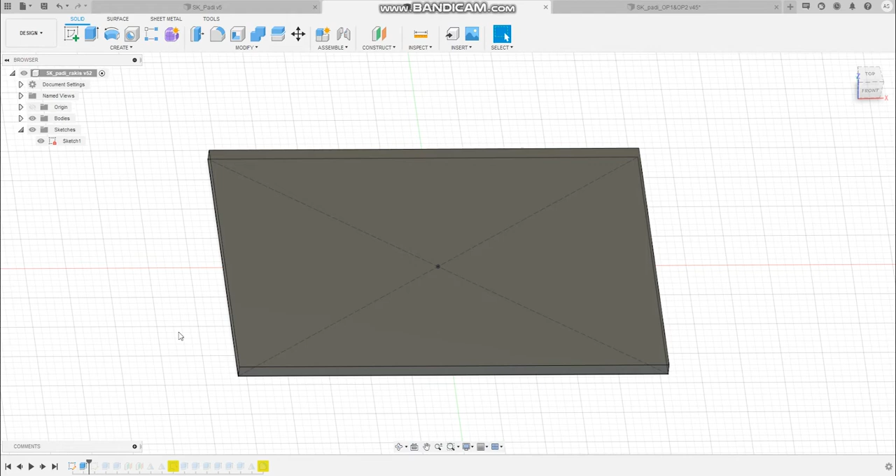Now we can create the sketch for first and third setup as they are made in the same spot. We create a contour line of the workpiece and place it 21 millimeters from the plate sides.

Holes for the fixture clamps are made. They must be 10.15 millimeters away from the workpiece. So this one here, this hole will be for first setup and this will be used for third setup, because at third setup the width of the part is 38 millimeters, but at first setup it is 41 millimeters.

A hole for hex socket head cap bolt is also made, and this is placed 5 millimeters from the workpiece.

For fixture clamp, pockets are made. These clamps are square and one side is 19.05 millimeter in length, and this pocket is 30 millimeters wide, so the round corners wouldn't block fixture grip assembly.

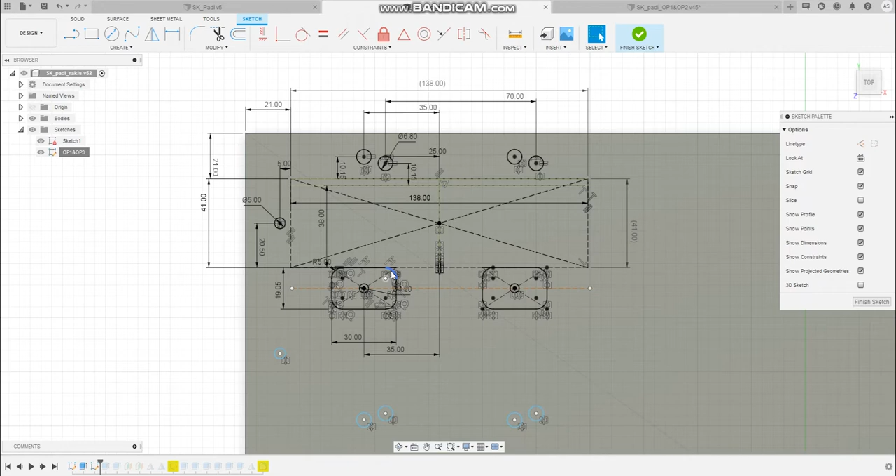To create all the holes to the other side, we just mirror these holes over this mirror line. And now the sketch is ready.

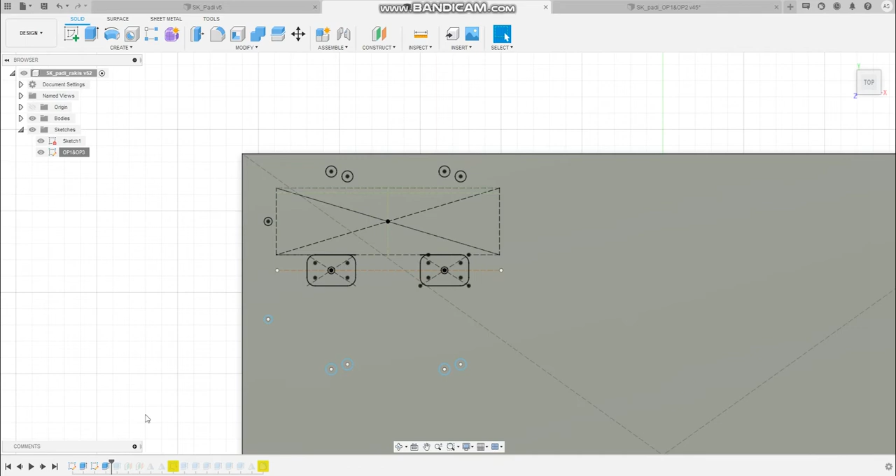And now we just got the pockets and also got all the holes.

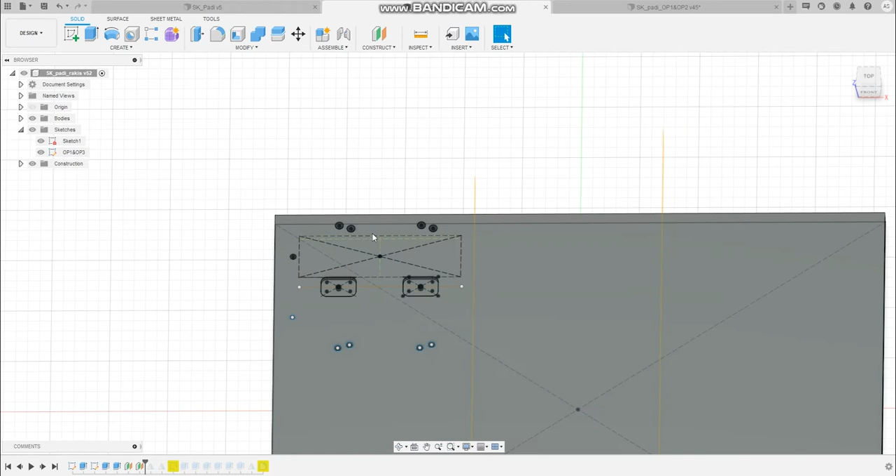And there is place for two more pair of workpieces. To create pockets and holes for them we just mirror our first sketch features, so mirror it one time and another time.

Now the first setup is ready.

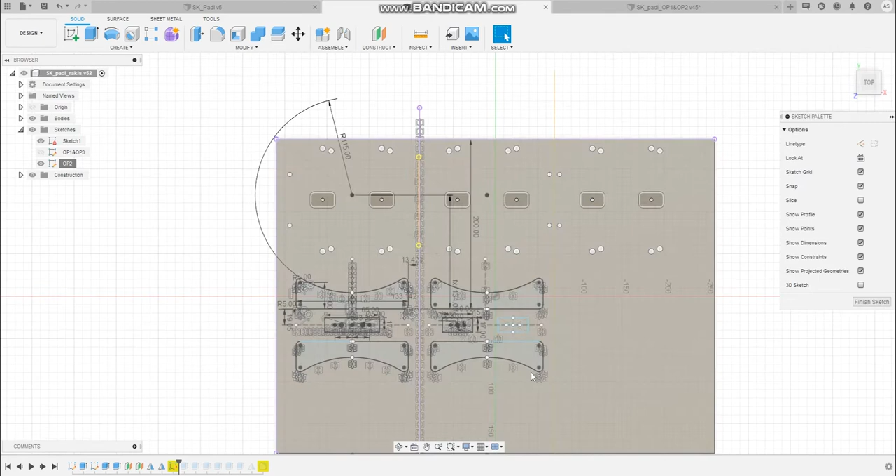For second setup, contour sketch of the part is copied and positioned in the right place.

And there we use two different types of Uniforce clamps, so we need to make two different pocket sizes. This is for the wider one and this is the smaller one. The width of this clamp is 38.1 millimeters.

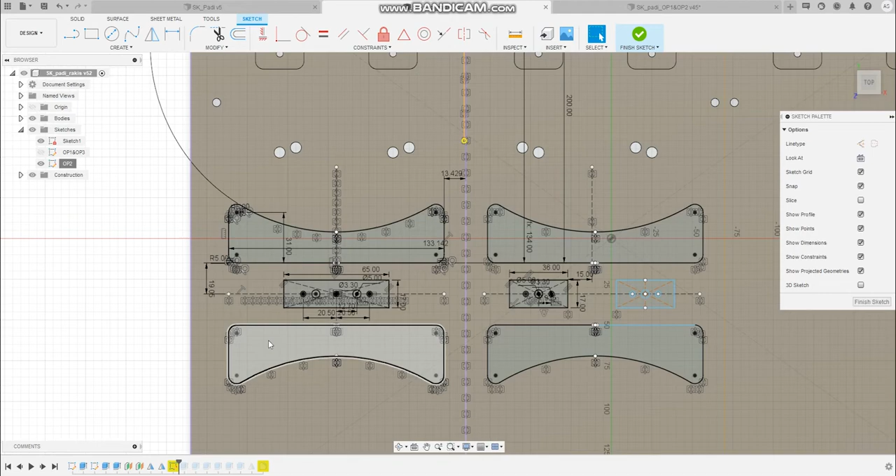And this is how far apart these two sketches are placed. And basically this is for the second setup.

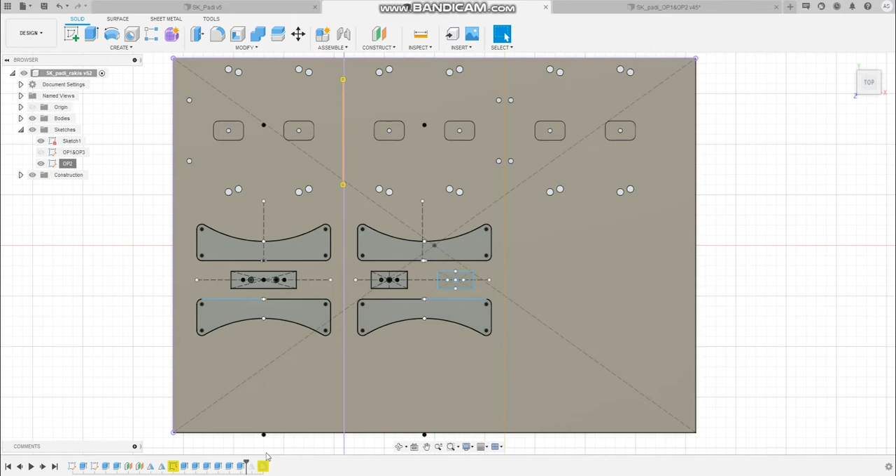To finish all the setup we just mirror this feature over this mirror line and we get the third pair of second setup.

Now fixture plate is ready and we can assemble all parts to it. For this we create another design.

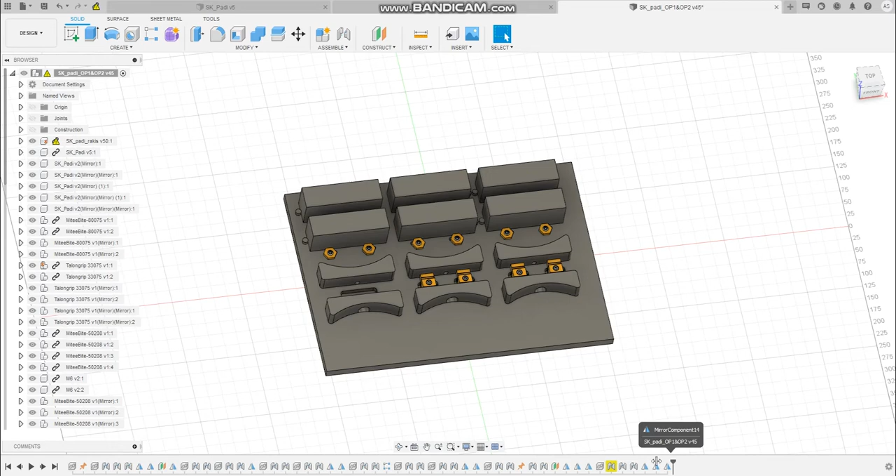This is the design final, and first we insert the fixture plate and ground it, and now we just start adding another components to this workpiece.

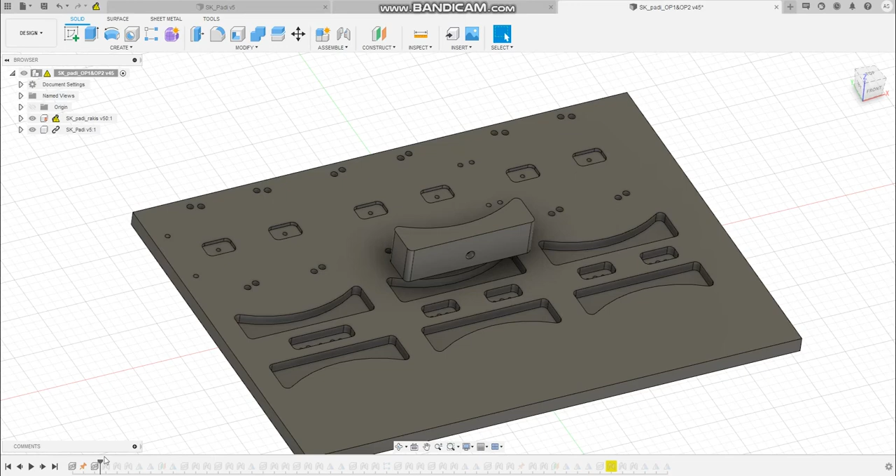First we add our part, we place the part and mirror it to another places.

Next we add the Uniforce clamp, we position it and add another one, position, and mirror it.

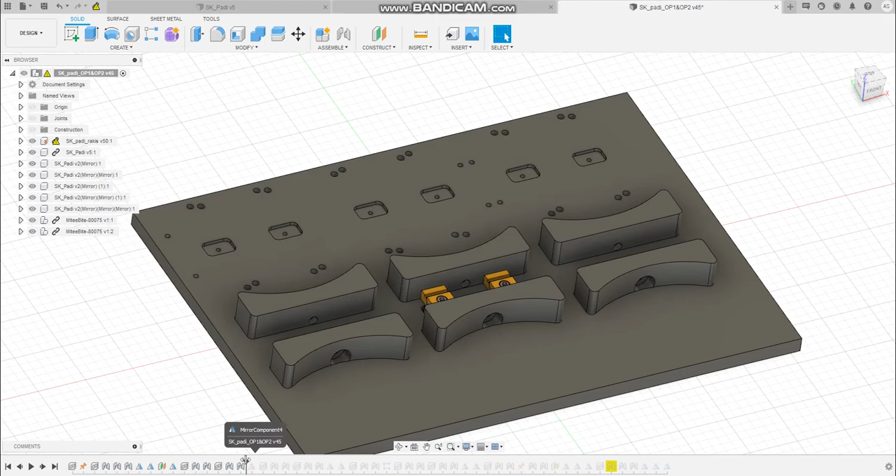Next we add the Talongrip clamp, also position it and add another, position, mirror 1, mirror 2.

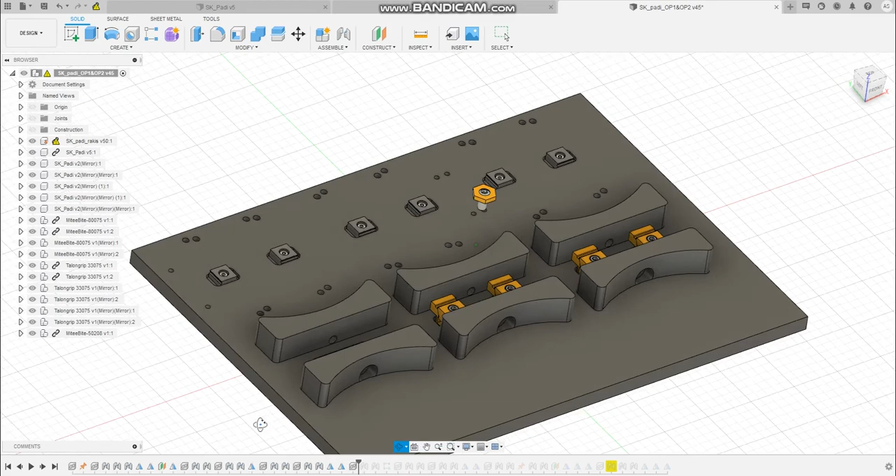Now we add fixture clamp. So we position it, and as it is placed in square pattern, we can use the pattern command and place the other 3 ones.

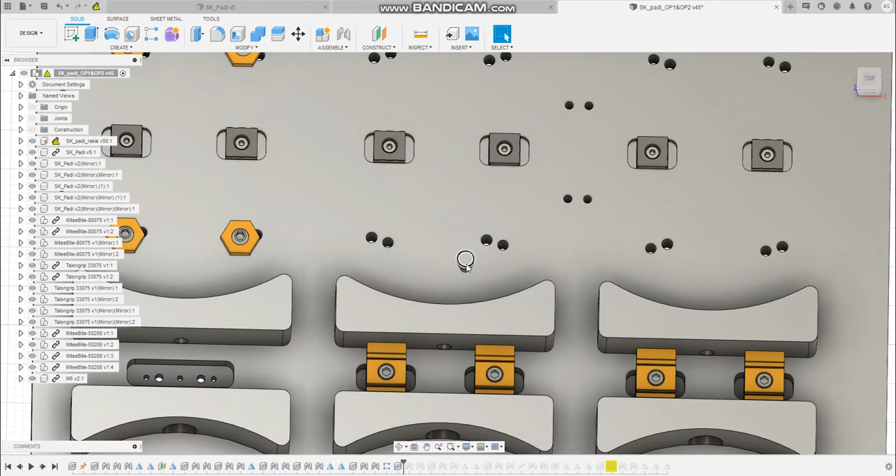Now we add the hex head socket bolts. We place these ones to go into these holes. Put another one and mirror them to these holes.

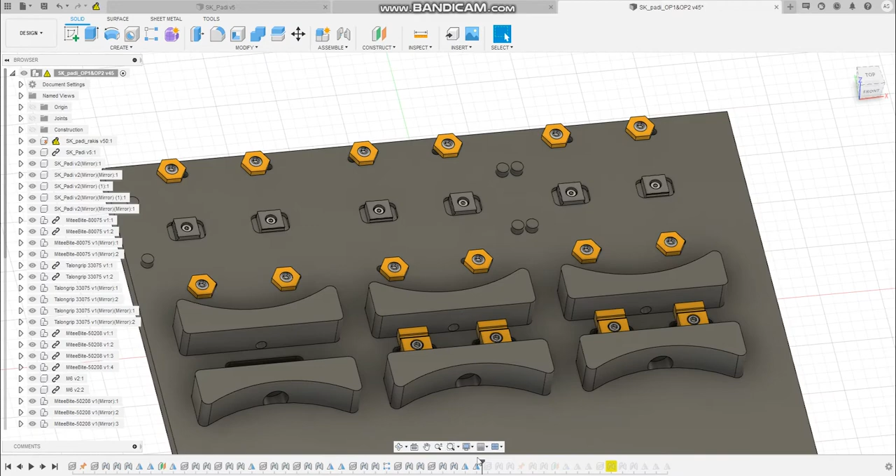Now we add our stock. This is which this part will be made of. We position the stock in the right place.

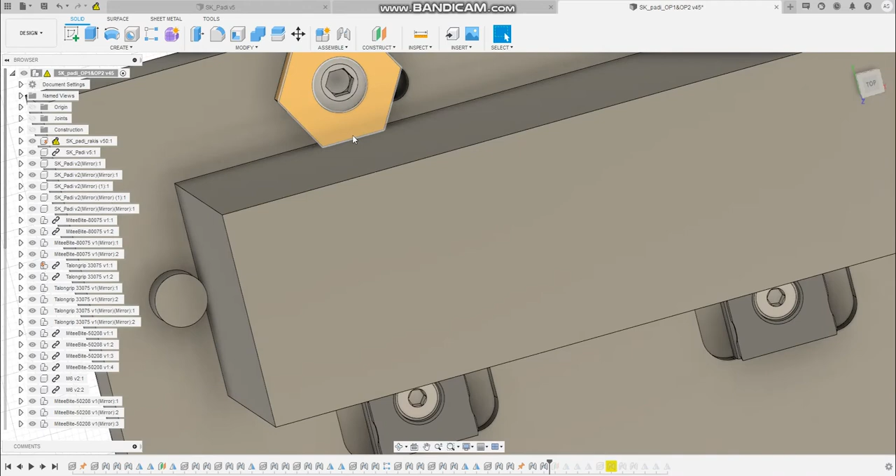You can see that it touches these clamps and these clamps and this fixture element. Now we just mirror it and get it to another places.

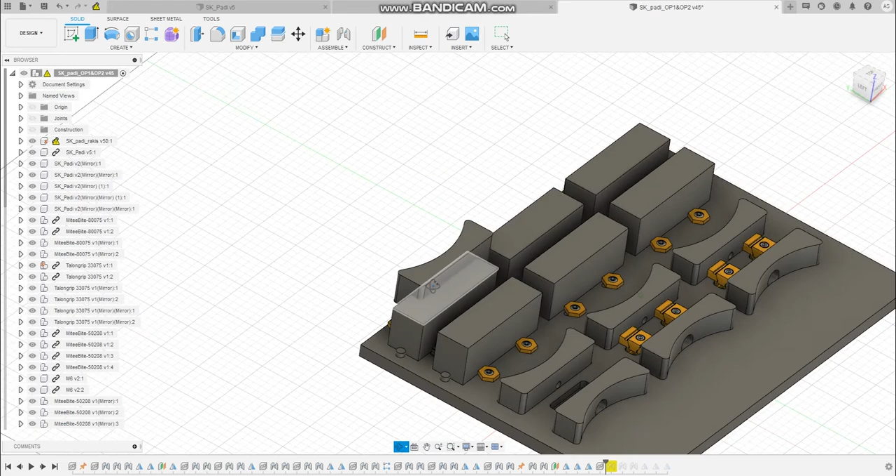Lastly, we will add our part here. This is needed for the CAM programming. I will hide all these parts now.

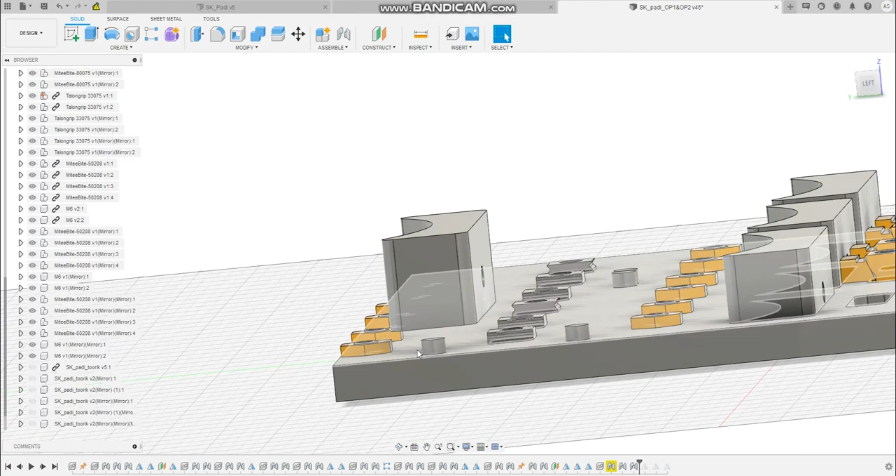So this is also positioned, and the position is 10 millimeters from the fixture plate and 2.5 millimeters from the fixture grip clamps and 2.5 millimeters from this fixture element.

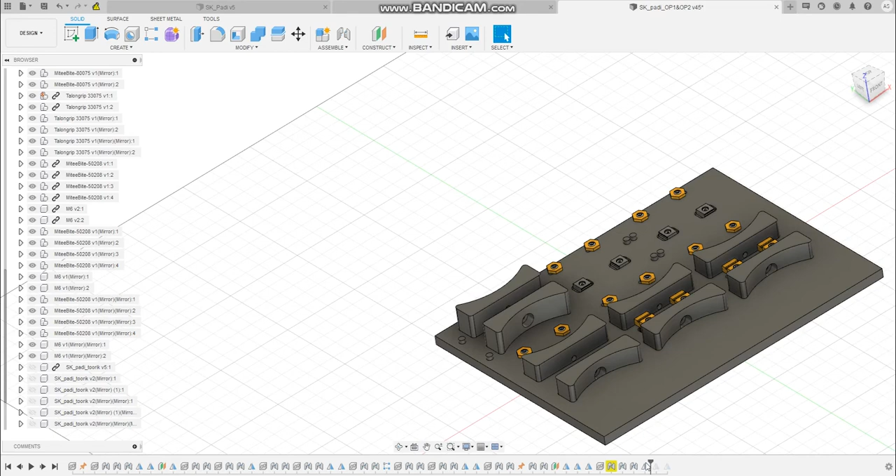And to get the other parts, we just mirror this one. And now our assembly for first and second setup is ready.

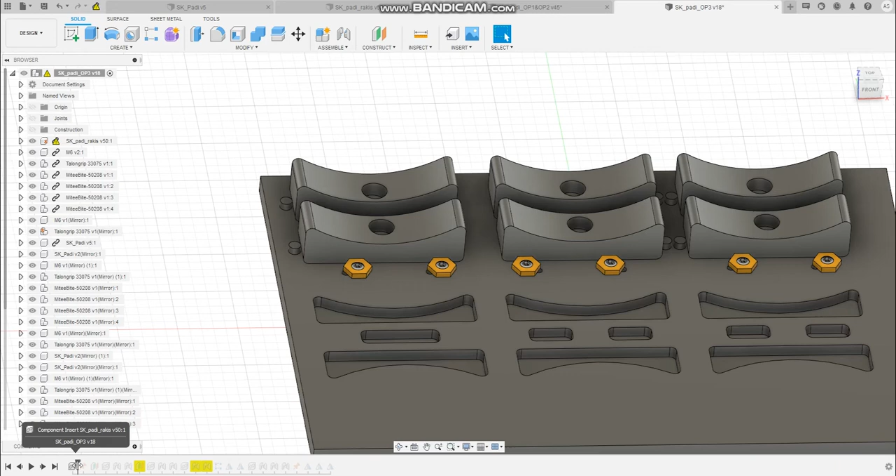For third setup, we use the first setup place. For this we also create a new design, add fixture plate to it and ground it.

First we add clamping elements and place it. Then we add fixture grip clamps and place it.

Add fixture clamp. Use pattern command. Mirror the other parts.

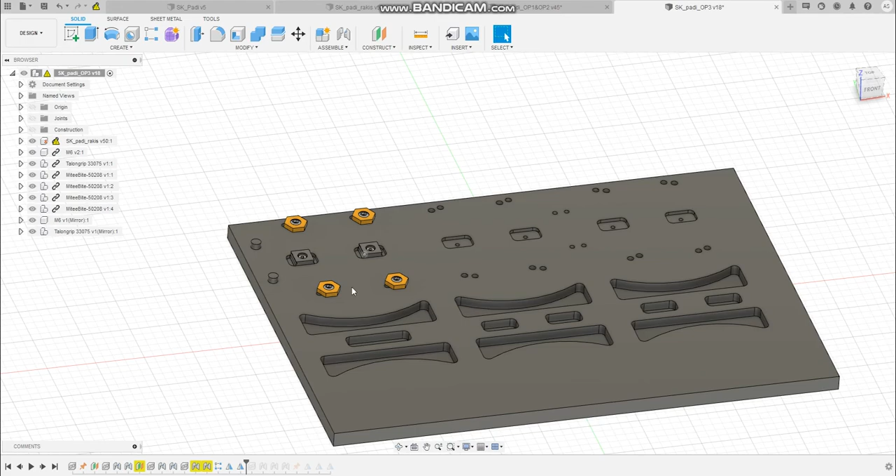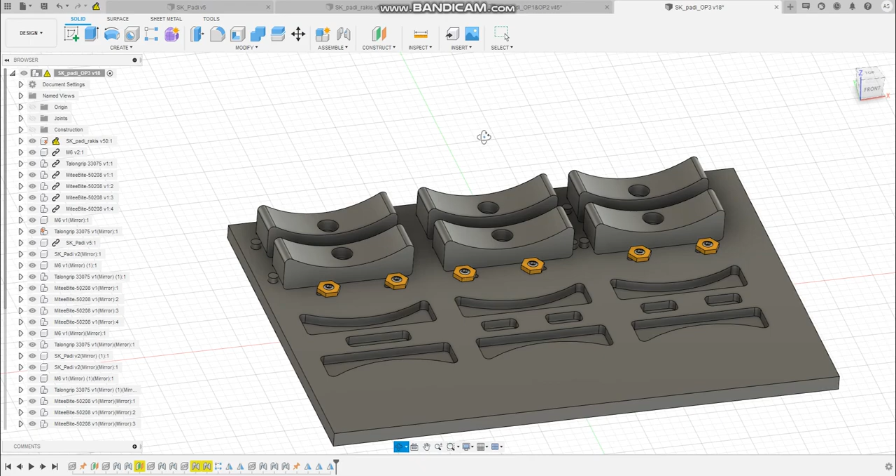Now we add our third setup part. We place it where we need it, and now we just mirror all these elements to another places. And so our third setup is ready.